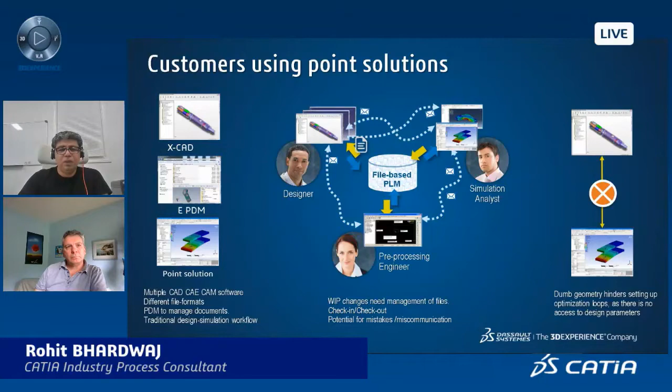And if we take it to the next step, if we want to run some sort of iterative simulation loop to optimize the design and run a simulation cycle, the neutral files make it really hard for us to access parameters, and it becomes really impossible to run design simulation loops. The net result is that experimentation takes a very long time.

These siloed operations create a lot of friction, and the PDMs which are managing files keep on adding more and more overhead on the engineering teams, resulting in about 30% of the time being totally non-productive, and people having to talk to each other, make mistakes, having to redo the work. Sometimes these lead to a lot of costly errors.

So the main topic for today is collaboration. There are unique possibilities of collaboration which are brought together by the 3D Experience platform. The first one is social collaboration. Social collaboration connects different departments, engineers, simulation people, even sales and marketing teams. They can come together on a social platform in communities.

They can exchange ideas, they can do intelligent dashboarding, they can even do project reviews, discuss different ideas to work on, and have a collaborative environment where they are doing kind of a non-product or non-program related discussion if they want to.

I'll say the third one first. The third one is more of a structured collaboration where the platform provides a way to securely do data exchange, data sharing, where the platform manages the versioning, the revisioning, traceability, lifecycle, and it helps everybody to track what is actually going on.

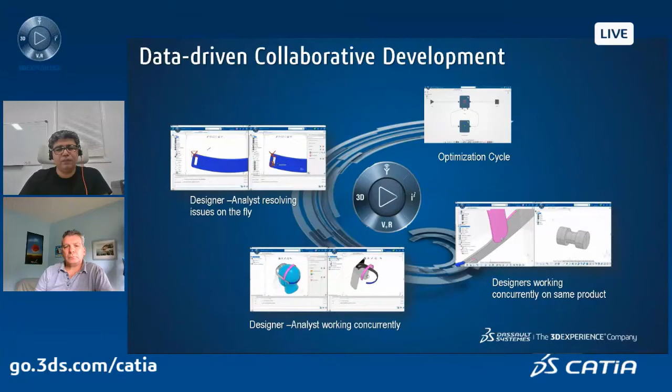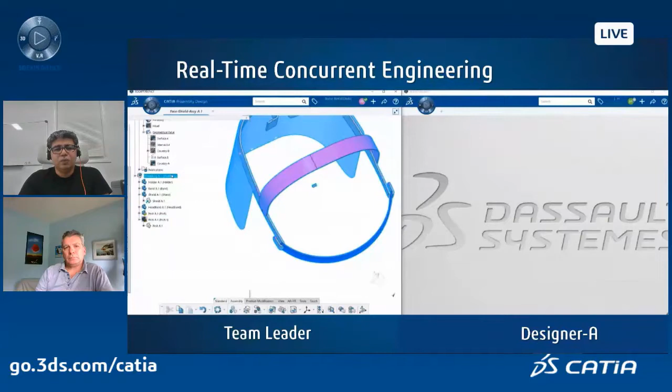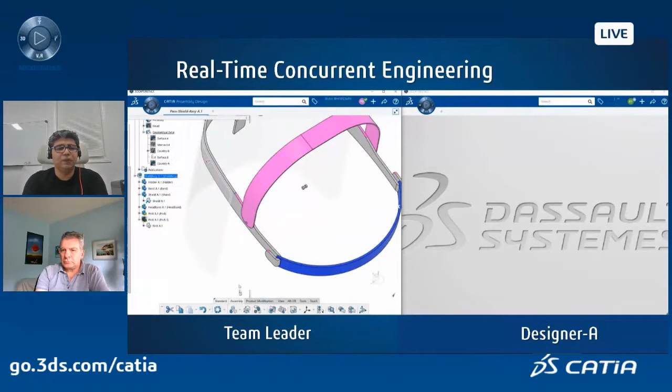So the person on the right has not logged in yet on the platform, whereas the person on the left, he started design work. He's assembling different parts in the assembly. Here you see him adding constraints to pins. Now there could be a lot of different people working on a lot of different parts and sub-assemblies in different time zones. And it becomes a big nightmare when we have to make them work together. What you will see is a really smooth and easy, informal way to work together on the platform.

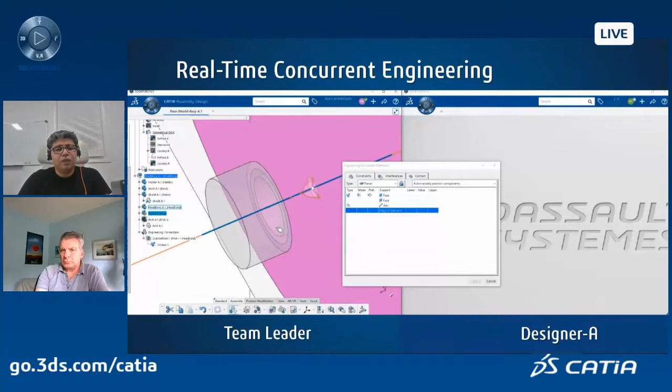So we can imagine the designer on the right is still sleeping in a different time zone, and he's going to come online very soon. So the guy on the left is working on the assembly. Okay, he has added constraints. And so finally, the designer on the right shows up. What he can do is he can look at a part that he wants to work on, and he can quickly go in and lock that part. So what he's really locking is a lock on the shape of that part or the form of that part. And the team leader on the left still has the control over the fit or the placement of that part.

So you can see that these 2 guys can keep working together. He's still changing positions, adding constraints. Okay. And very soon what you will see is that the designer will start editing this part. Okay. So now that he has locked it, he can just go on and open the part. Once this part is active, he can then start authoring different things, maybe just add a few features like fillets. Okay, so once he has done his changes, he can do a file save.

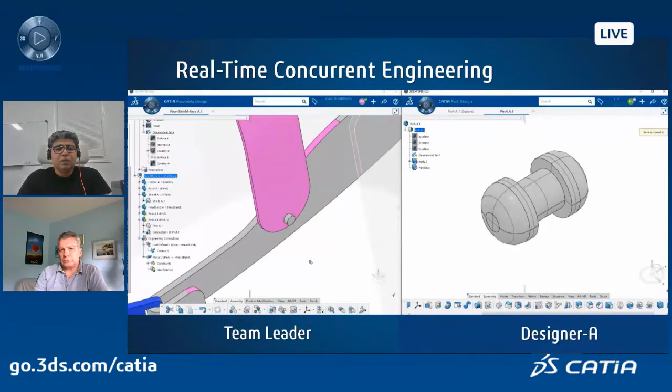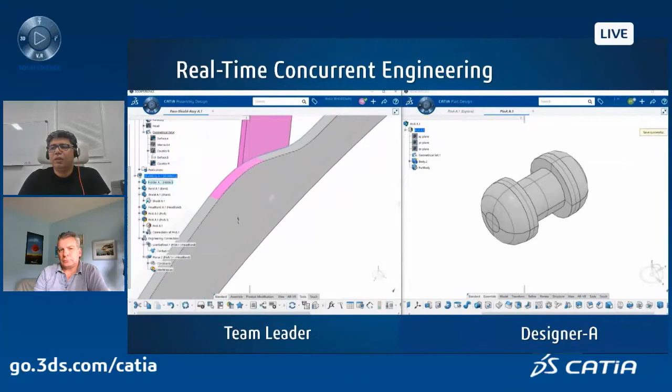The guy on the left, he may or may not, depending on how we set up the notifications. What he can just go and do is a PLM refresh. And PLM refresh is going to trigger all the saves that everybody else in the team has done. Maybe there are 7 things changed, different people working. And the moment he does a session refresh, you can see that the latest geometry of the pin gets refreshed in his session. So what we are seeing is that he doesn't even have to close his session, find what is the latest part, reconcile it in the assembly. But you can see he can still keep going.

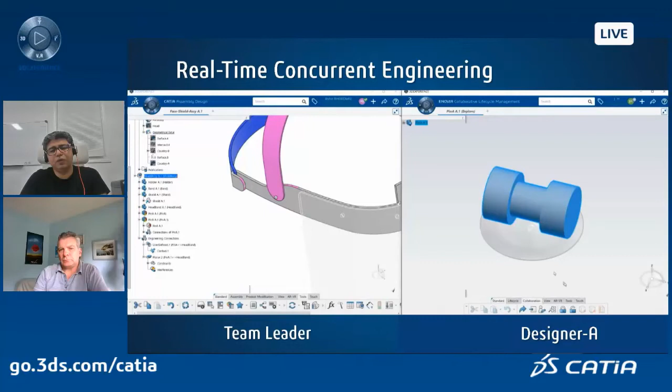The designer on the right, he has finished his part. He can then just go and unlock his lock and close his session. Right. So it's very transparent. It's very flexible, and this is what the data-driven environment feels like. Imagine the same scenario if we have to do it with a traditional PDM file-based system. You would have people sending emails, hey, I want to edit this part. Let me check out this file. And then once he checks out the file, the other guy has stopped his session. Now he has to wait for the other guy because he's working on that part.

We can actually compare the whole system to an airline check-in boarding pass system. 10 years ago, we started doing online check-ins. And what we would get is a PDF of a boarding pass in our email, right? So once we have the static file, this PDF file, we never know when it's out of date. We never know if the flight has been delayed, if there's a gate change or anything like that. But now with the data-driven apps on the phone, we have a wallet with the digital boarding pass. If there's a change, update in the boarding gate, delay in the flights, our boarding pass updates. There's kind of no excuse now to miss our flights. So on the 3D Experience platform, it is the same data-driven experience that you get, and not really sending files back and forth.

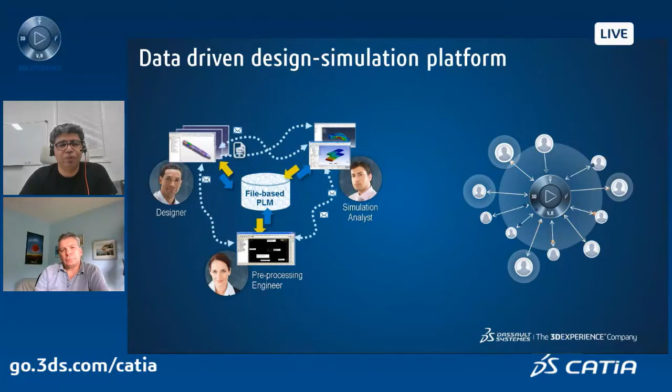So what that impacts is the overall cycle time that we end up having to incur in a program, where you would have either multiple people checking in, checking out files, and then the product manager having to reconcile different versions, releases from different people. Whereas for the work in progress session on the platform, it's very, very transparent, and everything refreshes in session.

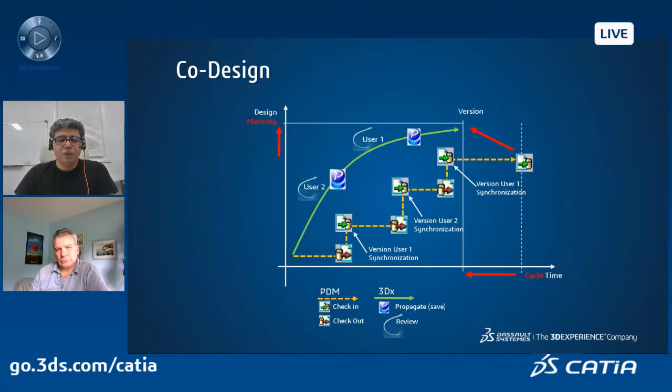Okay. So I'll quickly show you the next scenario, how two people work together on the platform. So now imagine that there are two designers. One designer is working on the holder part. The other person is designing the head strap of this face shield.

What they can do is within CATIA, they can enable a live chat session. So he can just start chatting with the other guy. Hey, what's up? What are you doing today? I need help with certain features. So you can see the guy on the left, he wants to design some complementary feature. For example, there is a hole in the strap which needs to match the holes in the head band. Right. So he can say, what are you working on?

The moment he accepts it, he can see in a ghost view what is the context of what the other guy is working with right now. Right. And then he can say, hey, you've already done those holes. Can you please share these holes with me? Okay, so the guy on the right, he selects the hole and clicks on a design share. The moment he accepts, the holes start appearing in his model.

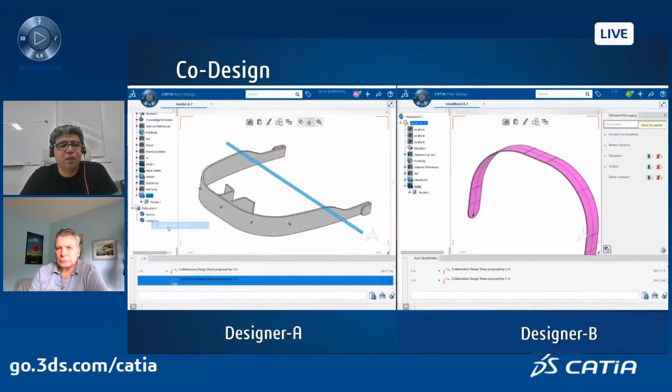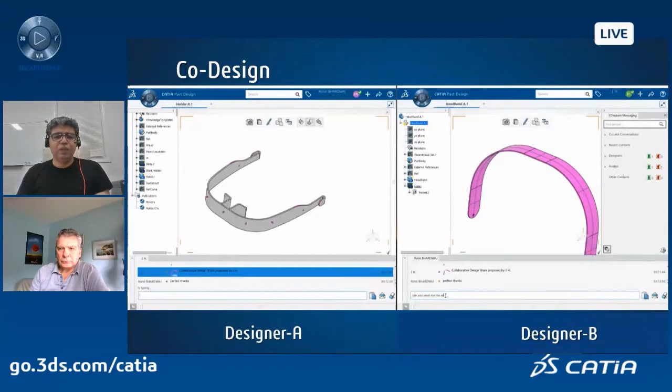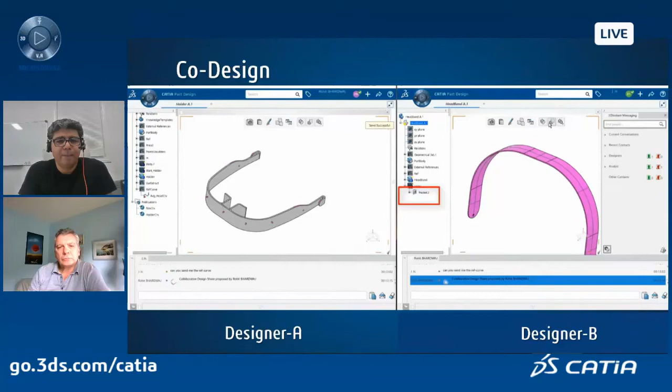Now you see that this guy has received the holes. He doesn't need to worry about the location and everything. That's all done. He can just then go on and assemble the holes in his file. The guy on the right then starts saying, hey, have you done the reference curves? Can you throw some curves to me? Right. So imagine that we're all working from home in the age of COVID-19, and people working so transparently between their sessions. So once the guy on the right accepts, the curves start appearing in his session.

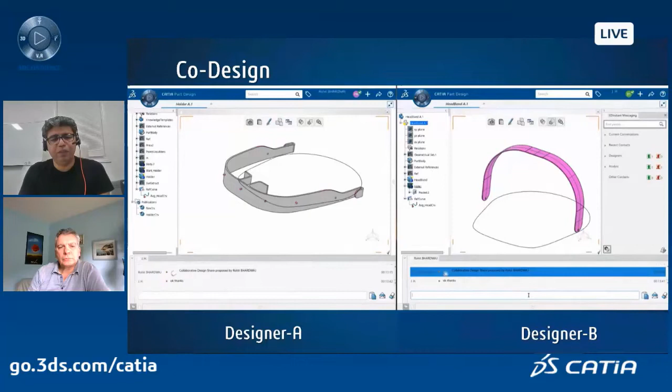So if we were to do the same thing on a traditional system, the designer on the right would have had to send an email. Hey, I want to speak to you. What is the best time for a meeting? I want to show you what I really need. Right? Set up a WebEx meeting. That takes a while, and then sharing exactly the right data with the guy on the left. That would have taken maybe half a day just to share the right information between two people working on the same team.

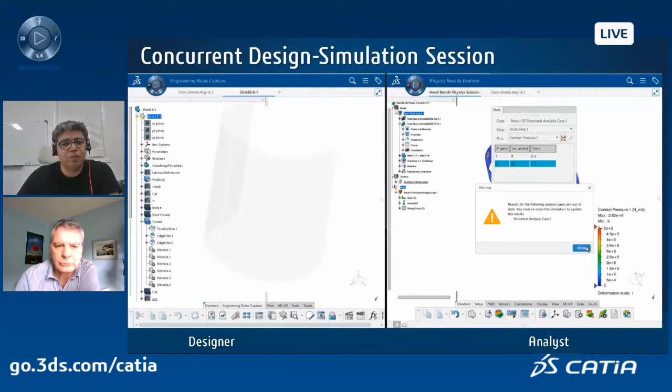What we see now is a similar collaborative scenario with the simulation. I think Romel is the analyst in this example. Romel, can you start talking about the simulation and design scenario, please? Sure. So based on the CAD that Rohit has prepared, I have made a simulation of putting that headband on the head, and I am interested in what the contact pressure is between the band and the head.

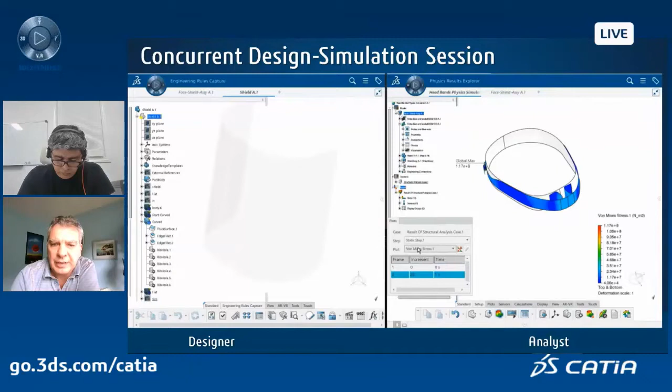So what we're seeing is the assembled and tightened headband. We are looking at the contact pressure here, and I see that we have some high pressure points at the forehead. I think the area of contact is too small. If we increase that area, we'll probably reduce the contact pressure. So I'm looking at the CAD designer for the project, and I'm trying to chat with him and ask him if he can change the geometry so we decrease the contact pressure.

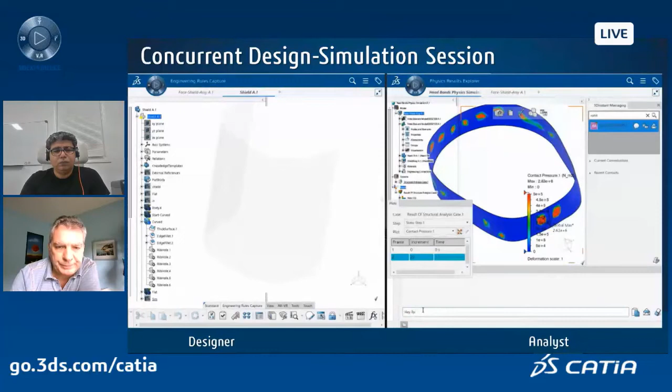So I am pinging Rohit. It looks like he got my message and he's responding. So I will ask him to increase the length of the contact portion of the band with the forehead. In this case, it's a simple length parameter, but it can be a very complex CAD feature which the designer needs to change.

So Rohit has received my request. He will go ahead and make the change. I will wait for him to acknowledge the change, and then I will refresh my model and rerun the simulation.

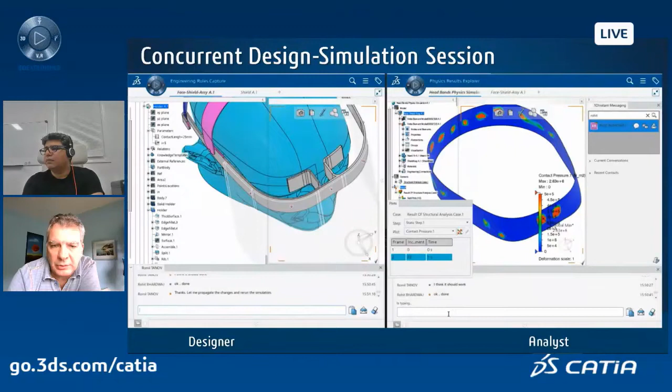And now we switch from results viewing into the model, and we can see that the CAD has updated, but the mesh is still the old mesh. Now I need to refresh, update the mesh to comply with the new geometry. And now my finite element model is ready. I can resubmit and get the new results.

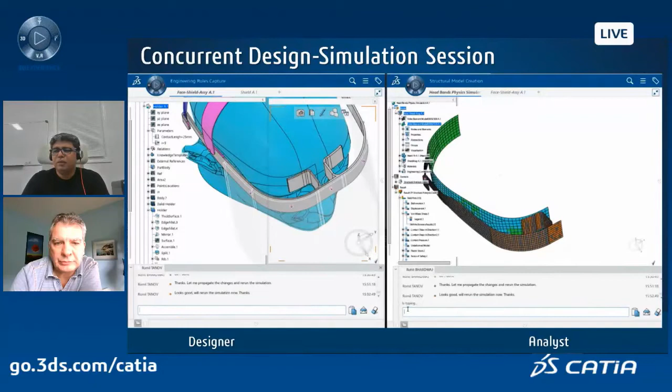Yeah, if we compare it to a traditional scenario where design has to check in a new version of the design, and then simulation people have to verify if that is the right change that they requested, just the logistics of getting this small thing done is a big nightmare.

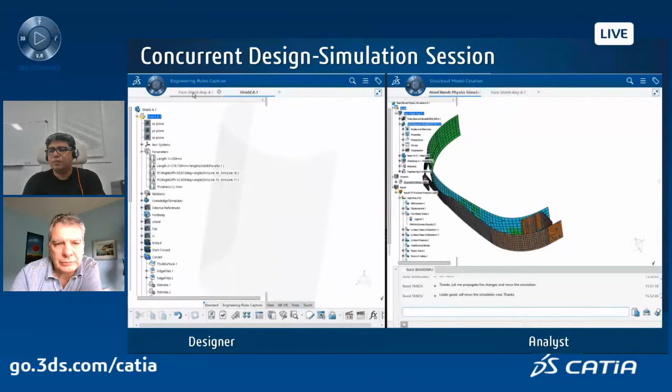So what you see on the screen is the designer continues to work. He keeps on making his changes. He's still working on the face shield, and he decides to decrease or change the length of the face shield. Right, whatever he decides, okay, this is going to be the length. He saves his session and tells the simulation guy, hey, I've done these changes.

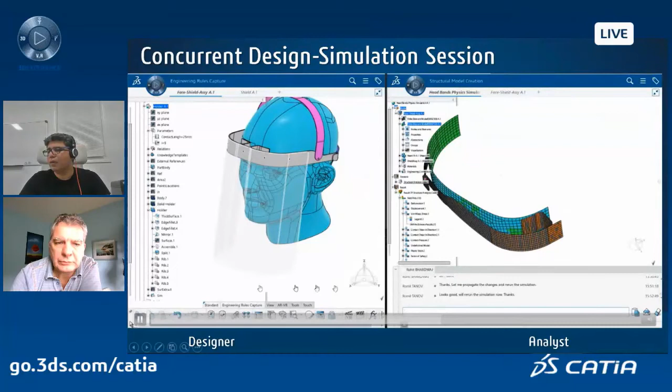This could be an automated notification, by the way, as well. In this scenario, because we are just showing collaboration, he can just go in, log into the chat, and talk to the simulation. Hey, I've made these changes. You may want to recompute. Can quickly skip the video to the step where he starts talking to the analyst again.

So this is all live, concurrent, people working together on the same project at the same time. We are really shortening the waterfall model of project, people waiting for milestones to get going. Here you see two guys can just chat and say, hey, I've updated, just refresh your session. That's it. And that's all it takes.

So the designer is informing me that he has changed the geometry of the shield itself. This is a different simulation that I've previously performed. So it looks like I will have to go and do the same thing. I will have to update the CAD, update my finite element mesh, and rerun that simulation to make sure the forming of the shield is fine. So I'm opening the face shield simulation now.

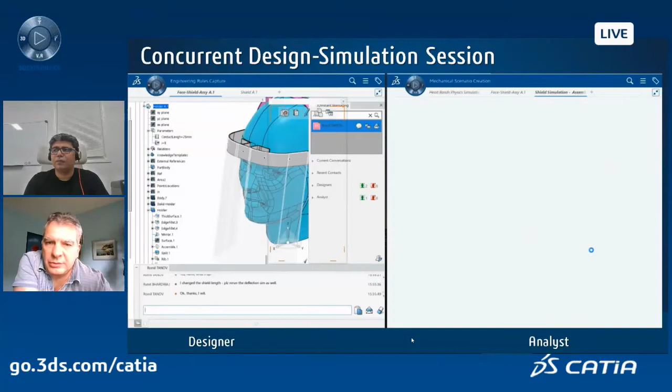So there could be multiple simulation objects connected to the same CAD data, right? If one changes, all the different test cases change as well. We currently have 2 finite element models connected to the same CAD data and 2 simulations using each of those finite element models. Now I can see the shield finite element mesh. I will show the shield CAD also.

So to propagate changes again, they just need to refresh their session. Can go in, click on PLM refresh, and the most updated geometry is gonna load within the same session. Yes, refresh session and run an update. So I'm refreshing the CAD and updating the finite element mesh.

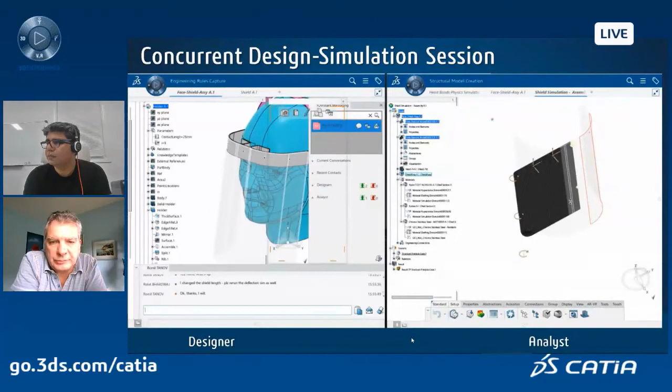And now you'll see the mesh change to conform to the new shape. And the simulation starts with the initial flat shape and then simulates how the shield is being formed into shape. Yeah. Now it's ready to rerun the simulation again.

Yeah, so it's that easy. If you compare it to a traditional PDM where it's all check-ins, checkouts, and having to reconcile these and recreate the simulation model, we can just compute the delta that we have changed and recompute and then update the simulation results.

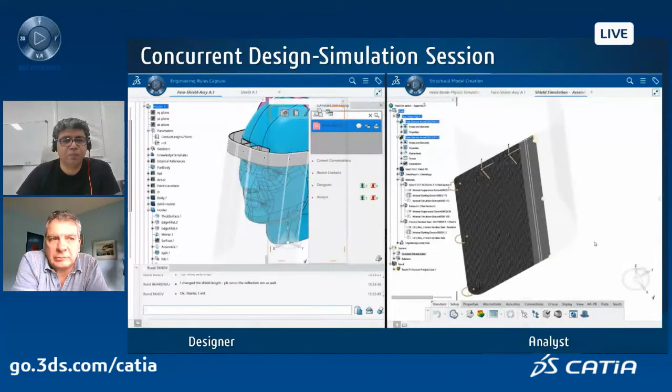Another small video that I want to show is, so we've just seen a simple collaborative scenario. Now there could be a little bit more serious changes where the two teams may want to discuss an issue, right? It may not just be, hey, can you change one length parameter, right?

So what you see right now happening is a designer and an analyst, they're still working and they want to start doing a co-review session, right? So they want to discuss something serious, and once the analyst accepts the co-review, he can start seeing the data that the designer wants him to see.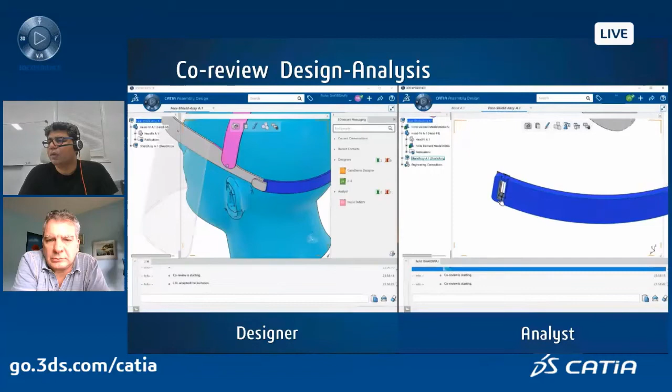Okay, so the co-review session is coming up. What you can see is they want to talk about this headband. The guy on the left is actually driving the session. When he zooms on a part, the screen of the guy on the right changes, the viewpoint matches. The other thing that you can note is they don't have the exact same view.

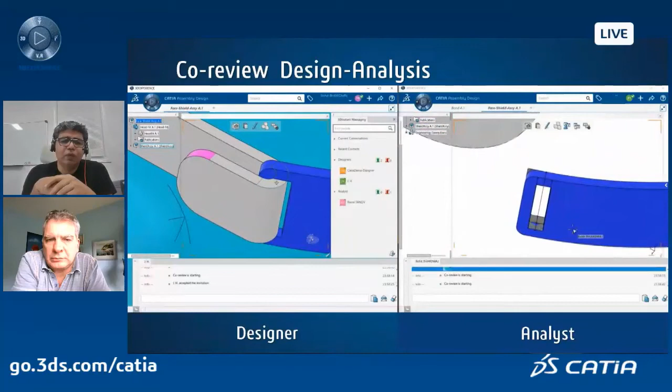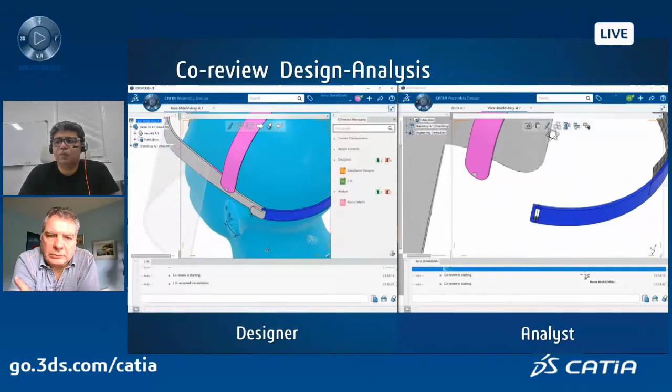So the guy on the left may have a different security context and he may have 20 different things that he's working on. But the guy on the right, he only has a security clearance to view certain parts, right? So he doesn't see the full session, but he only sees the parts that he has access to. Now they can do markups, they can zoom, pan, highlight certain issues, and do a review session.

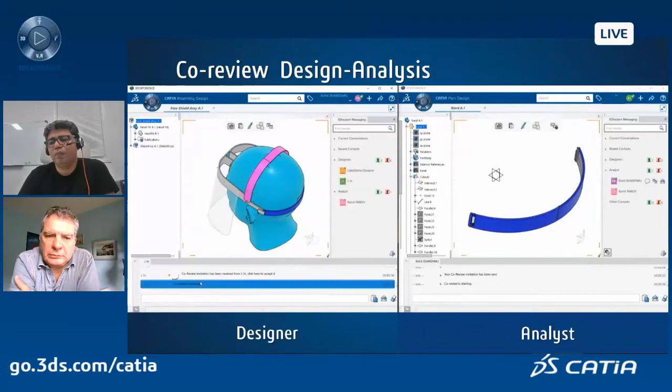In the middle of the session, the guy on the right, he may want to take control, and he says, okay, let me show you some things that are pending on your side. Now what you see is the guy on the right, he will say, I'm going to lead the review session right now. Designer accepts. The moment he accepts, you can see that the analyst is now leading the session, and he'll start highlighting the issues.

There are no fillets on these things. These things might crack, right? So they're discussing issues, they're doing markups, and they're sharing screens, all the three things at the same time. What we can also enable is a video chat running within the CATIA session as well, audio and video. It just doesn't have to be a simple plain text chat.

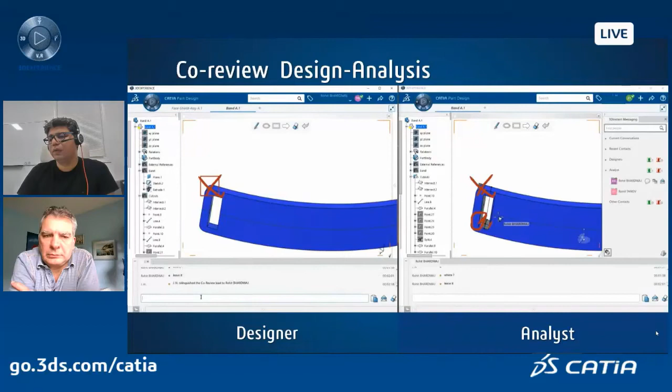So he's highlighting where he wants fillets, and the designer knows exactly what he means, right? If it was screenshots sent on email, there may be certain things that might be missing, right? So they're talking about different areas to review and change. And what happens in the end is once the session is done, so they're still talking about different things. Hey, I don't need this. I need a change here. I need a change there.

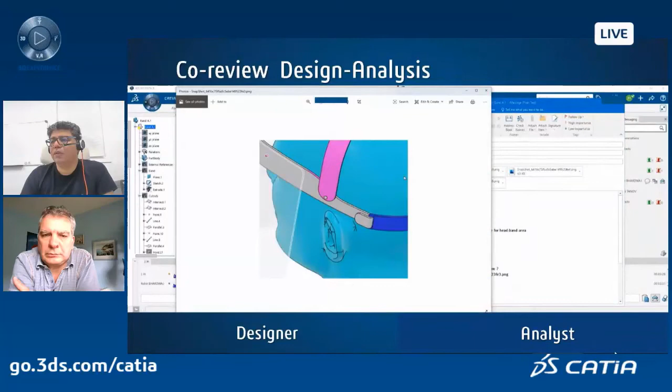What will happen in the end is once they've done this review session, they can have a record of this co-review session, right? He can click on this email icon, and it makes all the minutes of meetings, all the annotations, snapshots that they took. They were all recorded as attachments of the email, and they can also then CC other people.

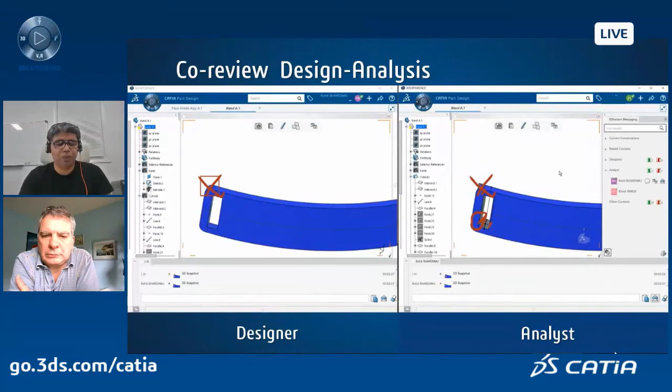Hey, this is what we talked about. This is what we decided, and we are going to make this change, right? So it's not just an informal chat anymore. If they want to formalize it, inform other people, then they can go ahead and do that as well.

So just by doing this, sometimes we avoid days and days of doing design to manufacturability review meetings or simulation review meetings, and people trying to book a room, block everybody's time, when practically what happens is only 20% of the people are actually required for those meetings. Others are there just to listen in. So we avoid a lot of these non-productive, wasteful meetings by just doing informal co-review sessions on the platform.

Romil, do you have anything to add on this? Well, this is a great example of collaboration between analyst and designer, showing how we can share the same data, work on the same data at the same time, and speed up the performance simulation.

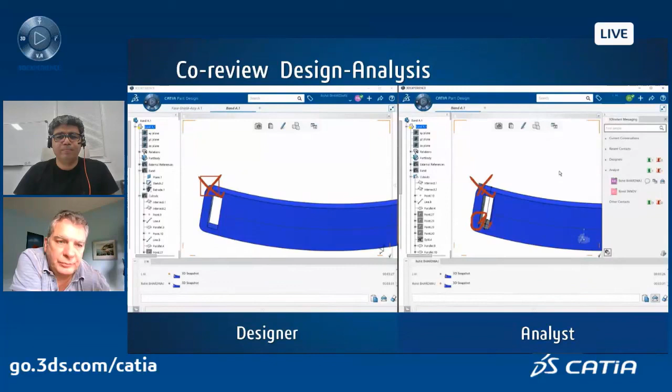So I'll conclude the session with an overall summary and benefits that we've seen. So 3DEXPERIENCE for design and simulation. It is the exact same environment for design and simulation with complete associativity back and forth. It is seamlessly integrated. There are no files, check-ins, checkouts, like a traditional PDM. Anytime there's a change in design, it is automatically updated in simulation.

And there are different levels to which we can control it, to make it completely seamless or make it interactive as well, and have it manually change as well. And it enables a lot of iterations, design experimentations, and simulations that we can do, and reduces the wasteful workload for the engineers.